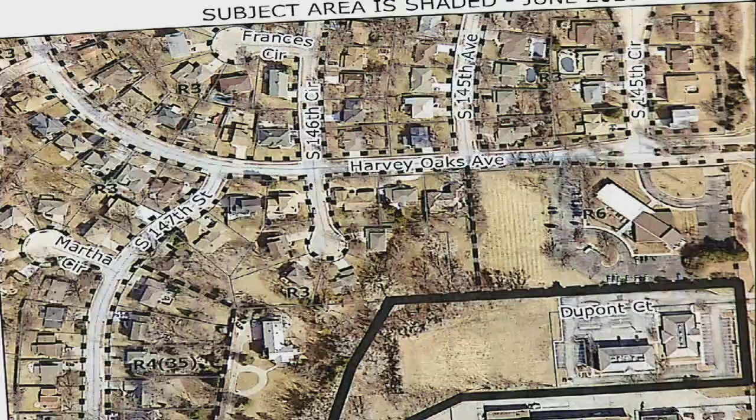So, starting out just kind of showing you the existing conditions and the surrounding zoning classifications. I know you're probably all relatively familiar with this location, but it's 144th and DuPont. It's outlined here in the black, 144th Street, West Center Road, running along the south side of the adjacent shopping center.

The adjacent zoning classifications to the north are R6, where the church is, and then R3. South of the proposed project is community commercial, east is also community commercial, and west is R3 and R4. The proposed site is a little over 5 acres in size.

It currently houses 2 office buildings shown here. The remainder of it is undeveloped and has been for quite some time. There's been a number of applications with respect to this property over the last probably 20 some years, so I think we finally have a project that will work here.

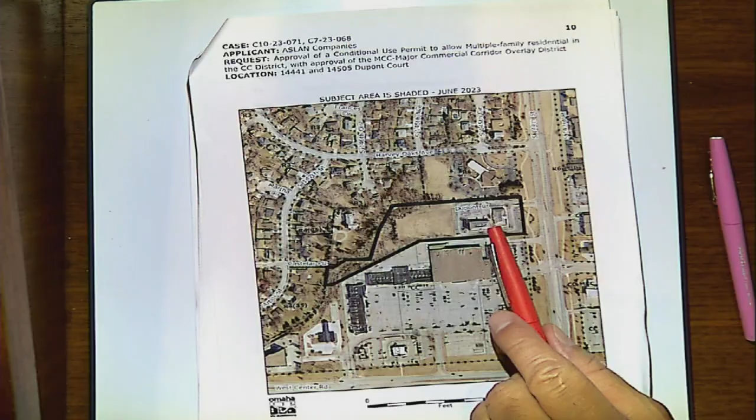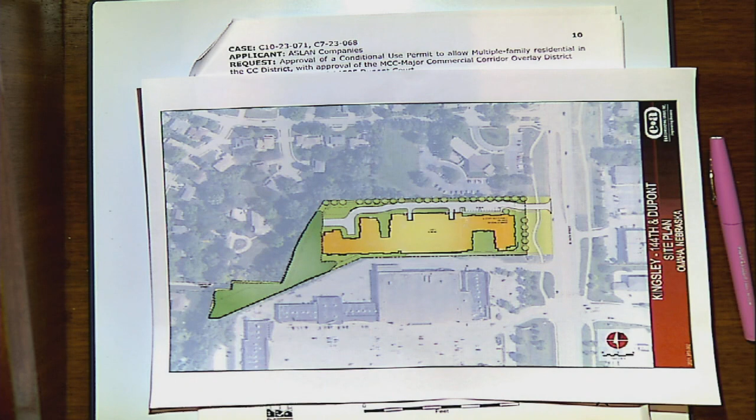The proposed project calls for the demolition of the 2 office buildings shown here and the construction of 1 building containing 199 multifamily units. This is the proposed site plan and the proposed outline of the building. So again, 1 building, 199 units.

It's a 5-story building, although in some locations it's only exposed 4 stories. As the property slopes down to the west, you can actually see 5 stories. Your elevations of the building are in the packet, and I do have some elevations I can show you as far as the general look and feel of the building from 144th Street.

So what we're seeking today is a conditional use permit to allow for this proposed project, and under the CC zoning classification, we can have multifamily with a conditional use permit that really allows you to go to the R7 base district zoning and site regulations.

There's also a recommendation of a major commercial corridor overlay district as well. Obviously that has to go on to City Council, but you're making a recommendation on that. So I just wanted to point out again, as you all know, that 144th and West Center Road is a...

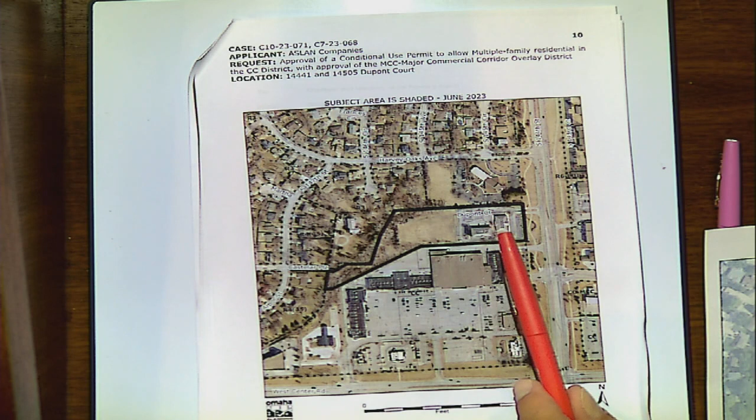165-acre mixed-use center. Also, West Center Road is a transit corridor that allows for unlimited multifamily units along the corridor. The master plan allows up to 500 units adjacent to the quarter-mile corridor, and also where you have a 165-acre mixed-use center. So again, 199 units is well under the 500 units permitted under the master plan.

As far as parking and all the other site regulations, we meet all of them, both with respect to the subdivision regulations and also the zoning code. The parking structure is contained inside of the building, and there are 345 parking spaces required. There are 355 parking spaces provided.

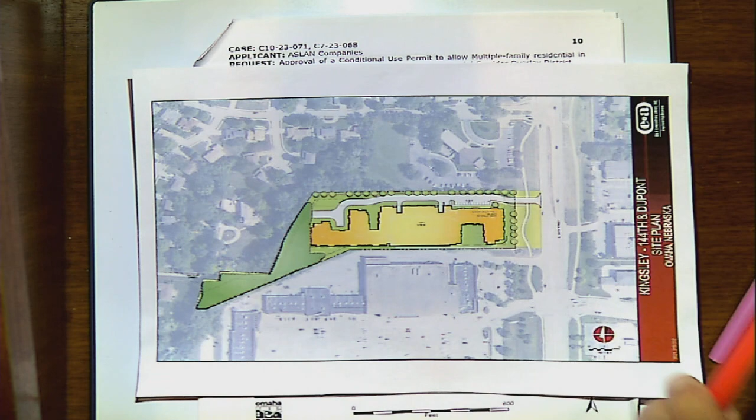There's also 12 surface parking stalls that serve the clubhouse on the north side of the building, shown here. So again, this meets all the site regulations for CC with a conditional use permit being R7.

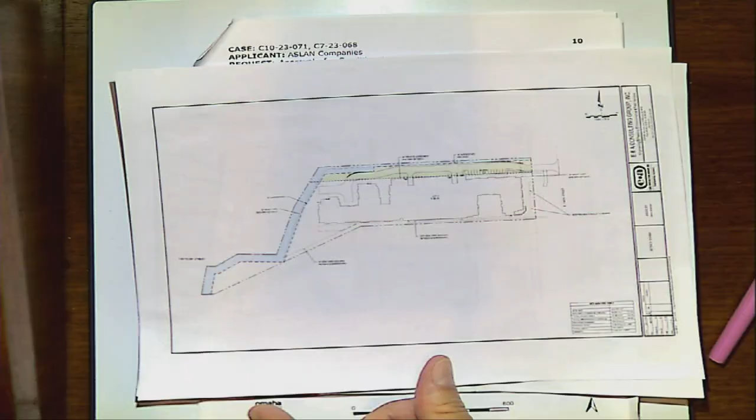There was some talk about a private covenant landscape buffer yard easement. We don't need to get into all the details of that, but all I can tell you is that it provided for a 60-foot buffer on the north side of the property, and I believe a 30-foot buffer on the west side of the property.

So what we did is we did an ALTA survey, and then we overlaid the site plan onto the ALTA survey, and we're outside of the 60-foot buffer on the north side of the property, and we're outside of the 30-foot buffer on the west side of the property. Other than that, we meet all of the other site regulations with respect to setbacks and buffer yards.

There was a zoning board of appeals case at one point in time, so we're completely in compliance with everything in that regard. We reviewed the recommendation report of the planning department, and we find the same acceptable.

There was a neighborhood meeting prior to the March planning board meeting that was laid over. I think the primary concerns were this private agreement, this landscape buffer agreement, which I think now with the ALTA survey and the site plan clearly shows that we're in compliance with from the private side.

I think the other concern was traffic on 144th Street. Obviously 144th Street is a major collector arterial, as well as West Center Road. I would just point out that this is already zoned community commercial, and the zoning uses could be much more intense under the current zoning than...

...they would be under the R7 in this particular multifamily project. So with that, we think this is really a downgrade with the conditional use permit from the existing zoning. And with that, I'm happy to answer any questions.

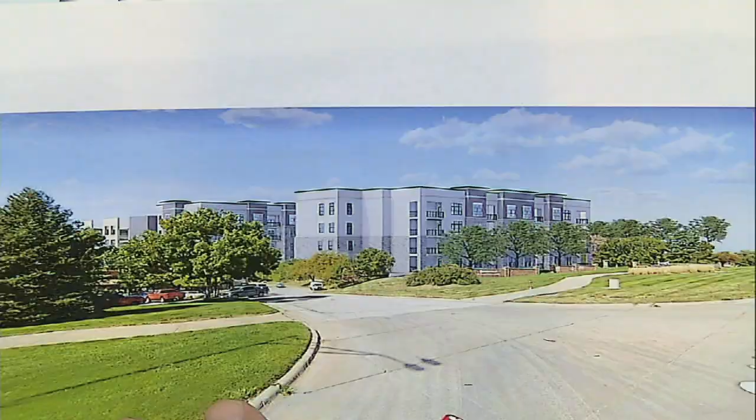This shows just another building elevation. This would be the shopping center to the south here, and this is the drive into the shopping center into the back. So this shows more of a looking northwest from 144th Street. Again, we think it's an attractive building, and I think it fits in nicely here.

There's still quite a bit of green space. All this back here is really undevelopable and is wetlands and drainage area and such. So I think this project is a nice project for this particular area and fits in well, both with respect to the shopping center to the south and to the single-family residential neighborhood to the north and west, and the church to the north as well.

So this was laid over in March, I believe. Right. And there was some opposition to the proposed plan then. Have you talked to, has there been any other meetings with the neighborhood since then? No, and the reason why we didn't think we necessarily needed to is because I think we addressed all their concerns.

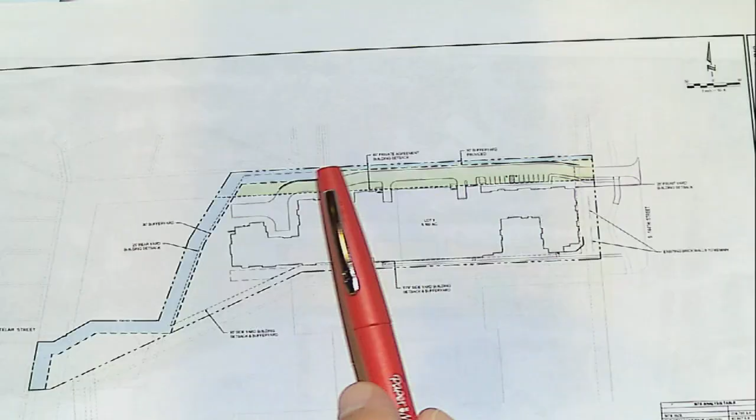The building that we had before came up into the buffer yard area and actually came into the 30-foot buffer yard on the R4 zoning here to the west. So the fact that we were able to push the building down and accommodate all the concerns, that was the main thing that we heard at the neighborhood meeting. There was probably 90 people there, and it seemed to me that the main focus was that you need to comply with this agreement. So we shifted the building down, and we were able to do that as shown by this particular exhibit.

Okay, good. Yeah, we got no public correspondence. I think most everyone's satisfied now. I think that was, like I said, the biggest concern. Good, good. Thank you. Thank you.

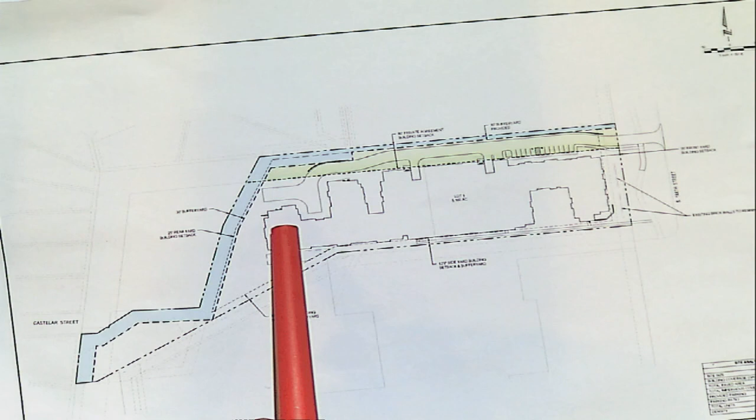As far as the 60-foot buffer in that private agreement, that's met all the way through on the north, and this is 30 feet here. You can see to the building, it's well beyond the 60 feet. So we think we're well in compliance with the private agreement that is in place, and we acknowledge that it's recorded. That's why we shifted the building south to stay out of that buffer yard.

We think we've addressed really all the concerns of the neighbors that we can address. The traffic is the traffic. We think this is a better use for this particular location. It's a down-zoning. There is no connection whatsoever between this particular project and the Harvey Oaks neighborhood or the church, so if people are making that kind of use of the church's parking lot, maybe that's an enforcement issue.

I don't know, but is there a plan to put a fence up along property lines or anything like that? I don't know the answer to that. I would say probably not, but there's no traffic connectivity whatsoever. Right, yeah, I get that.

Larry, do you know if pets will be allowed? Pets? Yeah, most likely, yes, pets will be. Will there be a designated area for the pets? Yeah, there's a designated dog park area somewhere on the site. I didn't see it designated on the site plan, but yes, that'll all be handled.

Larry, maybe you can't answer this question for your client, but I'm going to ask you anyway. Do you think this project would go through if that U-turn was eliminated? I don't know the answer to that. Let me just say, I'm not opposed to the plan at all. I am concerned about safety, truly. So it's not in opposition to the plan itself.

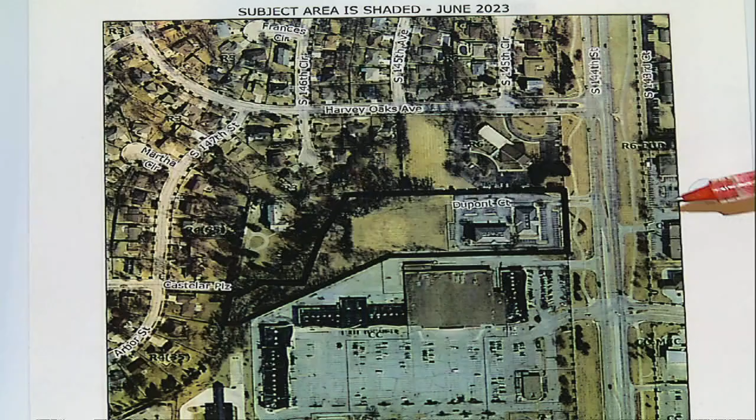Why is that U-turn there? It's only there for one—I can only see it there for this one piece of property—because there's a lighted intersection at the Harvey Oaks development where you can go any direction. There's another one on Harvey Oaks Avenue, so the only one really affected by that is the existing property. There's two accesses; the one in question is right here—I don't know how clearly this shows up on the aerial—and then there's a secondary access here on the backside at Harvey Oaks, the commercial part.

So to your point, yeah, there wouldn't necessarily need to be a U-turn movement there if those accesses didn't exist. But take a step back and look at the area as a whole and what we have in front of us today: the subject property is here, and they don't have frontage to any other right-of-way. Their only potential access is to 144th. Just to point out, this is kind of a relic of a previous regulatory framework where that was allowed to happen.

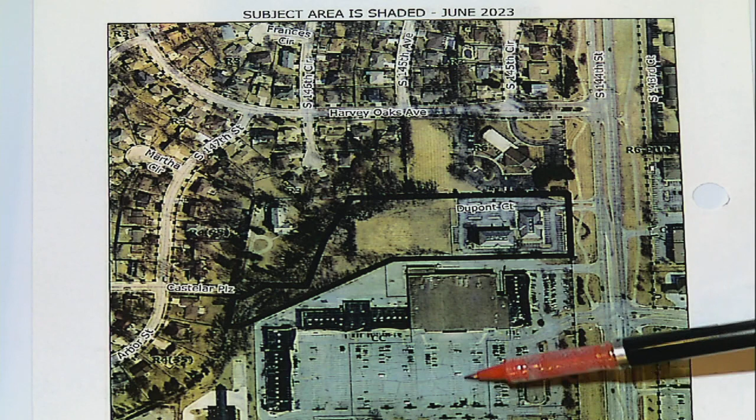We don't do that anymore. We understand these issues that arise, and over time we have changed the master plan and the city code so that the commercial area, the multifamily, the residential, and your civic uses would all be kind of integrated, with transition areas and things like that. But there'd be a network of public streets to handle all that circulation internally, and then there'd be one single access at a signal—there wouldn't be all these driveways and U-turns because we'd have that internal connectivity.

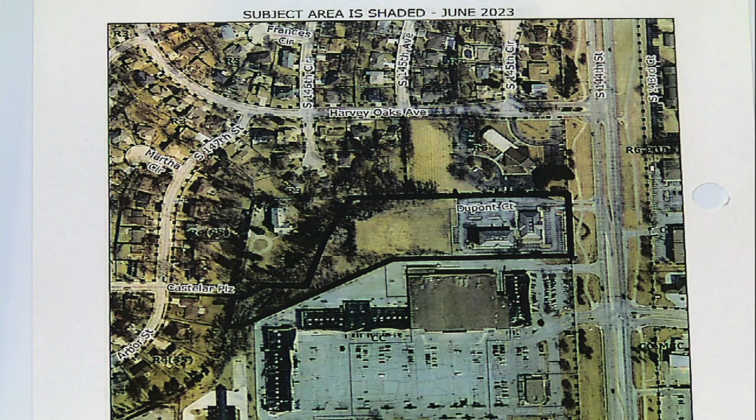So part of what we're dealing with is the fact that there's no driveway between the subject site and anywhere in the neighborhood. For better or worse, there's no way to undo or change that without a broad redevelopment, which obviously isn't in front of us today. So we're responding to the proposed plan to the best of our abilities based on what's out there today. Okay, thanks, Ryan.

Okay, any other comments or questions? Mike, were you going to say something? Okay, Eric?

Yeah, so I don't have too much to add. Obviously, the applicant has made several modifications since the original layover in March, both for some of the building design and the skin of the parking garage in the center portion of the building. So we appreciate working with them on that so that it is MCC compliant. There's modification to the access, narrowing it down from the current configuration, and clarification on the FAR to make sure that's compliant. So there's been a lot of work that's been done on the applicant team, and we appreciate it.

There are a few additional tree plantings that need to be added, but there's room for that both on the northwest corner as well as on the north portion of the site for the interior landscaping. So those are minor items. There will need to be some reporting due on the wetlands, which they'll continue to work with the U.S. Army Corps of Engineers and provide us information regarding that. So I don't have much to add. Obviously, we've discussed this a few times at pre-meeting, so I don't know if you have any additional questions.

This project is a two-phase, two-building project that's being proposed for the now vacant site. It includes the construction of a four-story mixed-use structure for one of the buildings, with about 16,000 square feet of main floor retail uses, perhaps about 7 bays, and about 81,000 square feet of office space on the upper 3 floors. The second building will be a 4-story apartment building with 99 units.

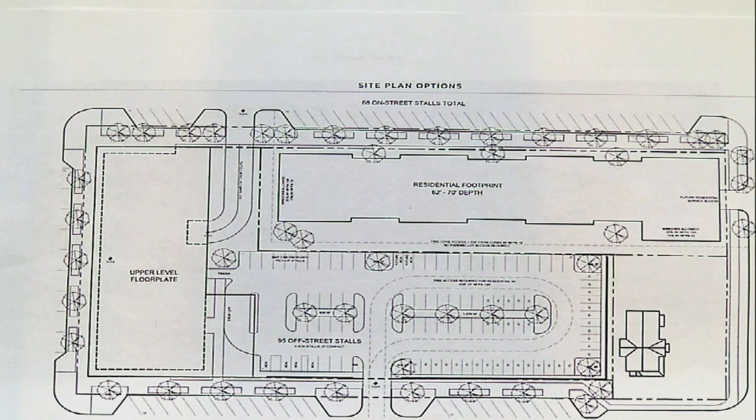This is one building, this is the other building. That building will include daycare facilities, a community room, and a fitness center. The developer is Forever North Real Estate, LLC, which is largely comprised of Carmen Tapio, Mike Peter, and Ashley Kuhn. Total project investment in North Omaha is about $72.5 million. The TIF support for the project is $9,463,221. Project meets the required criteria of our TIF program, has been reviewed and approved by the TIF committee.

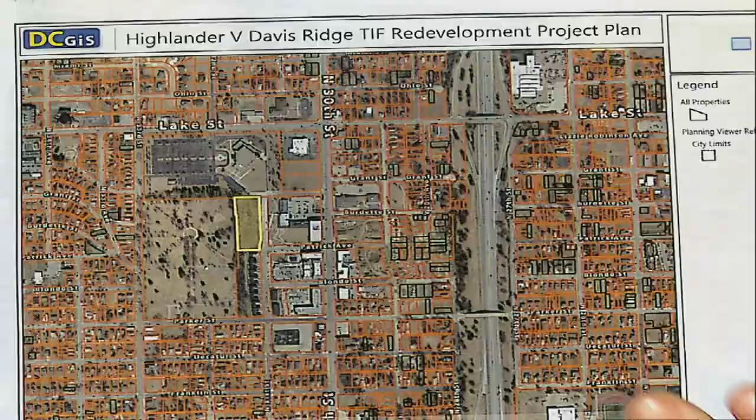Don Seaton, Omaha City Planning Department, will remain in North Omaha for the discussion of this project, located at northwest of 31st Street and Patrick Avenue. It's the parcel right next to the cemetery in red here. This is the 5th phase of the Highlander project that most people are pretty familiar with.

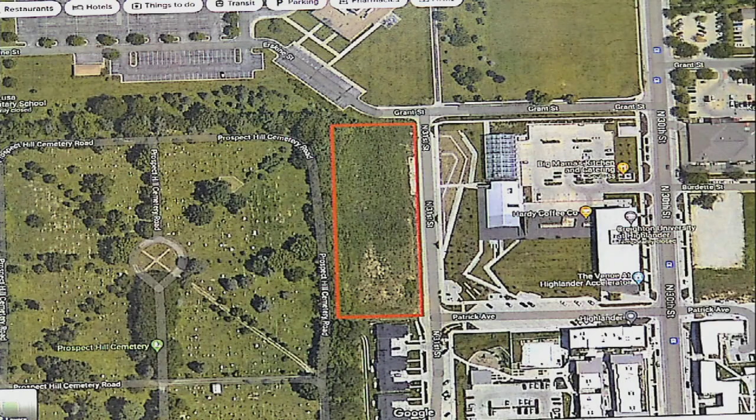It involves the construction of a new 41-unit mixed income residential development on the vacant lot. There will be 41 units arranged in 7 3-story walk-up residential buildings. This is the 5th phase of the project, and the developer is Brinshore Development, managed by Todd Lieberman. Total project investment in this project is $18 million.

The TIF support for the project is $501,775. This project has been reviewed and approved by the TIF committee. It is an appropriate land use for the area, complies with the goals of the city's master plan. Really, it's just an expansion of what we've seen at Highlander so far. Very good developments, positive developments for North Omaha. We ask for your approval.

Thank you, Don. Any other proponents wishing to speak? Hi, Bill Lukash, Brinshore Development, 903 South 184th Avenue Circle. Here to answer any questions you might have about the project.

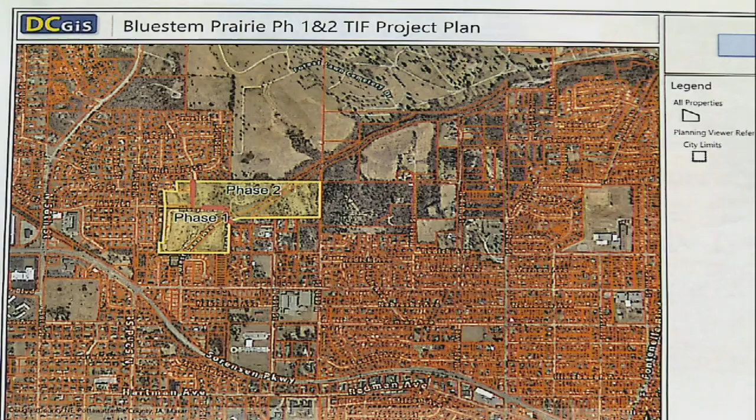It's adjacent to Habitat for Humanity's Bluestem 1 TIF project, where presently 85 homes are being developed. The two phases of this project involve 112 additional new single-family homes that will be built in two phases. The project site is within an extremely blighted area. It qualifies for a 20-year TIF term.

The developer is HFHO Real Estate Holdings, which is basically a subsidiary of Habitat for Humanity. Amanda Brewer, CEO. Total project investment for both phases is approximately $49.3 million. The TIF support for the project in phase 1 is $3,971,458, and for phase 2, an additional $3,036,997.

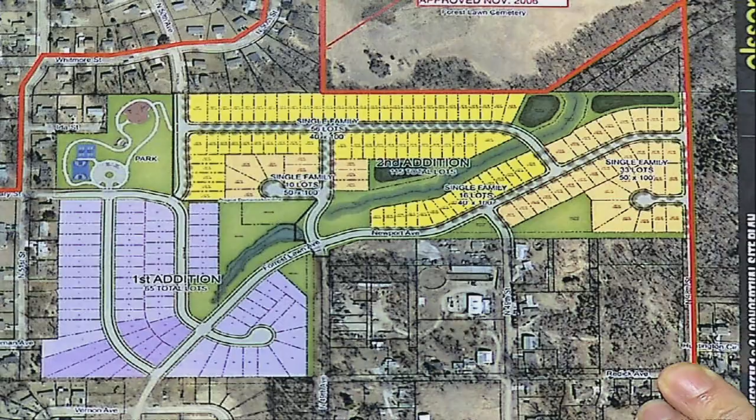Again, this project meets the criteria of the city's TIF program. It's been approved by the city TIF committee. It's an appropriate land use for the area, complies with our city master plan, and again we ask for your approval. A couple more exhibits showing the two phases and the lot layout, and then some example building elevations.

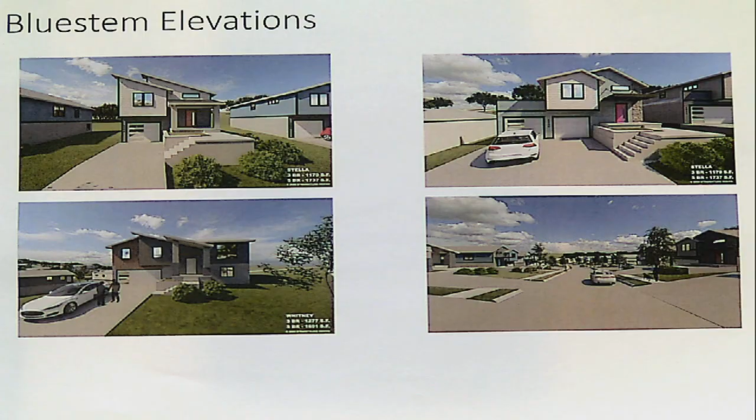Good afternoon. I'm Al Shimmick, 5006 North 192nd Avenue in Elkhorn. I'm Finance Director for Habitat for Humanity and would be available for any questions. Okay, thank you, Al. Any other proponents?

I'm Steve Brunken, the Executive Director and General Manager of Forest Lawn Cemetery. I'm not here for or against, but I have some concerns that should be addressed. The area immediately adjacent to our undeveloped land has been known to become a playfield or playground for ATVs and motorcycles. There's been hunting in there; we have evidence of that. The land is not safe for ATVs or cycles. There are ravines in there, and we have concerns about liability if kids would get back in there and do things that kids do. As far as the project, I'm neither here nor against, but we're just concerned about safety for the residents that will be moving into the area. Thank you. Any other proponents?

Seeing none, are there any opponents? Seeing none, close public hearing.

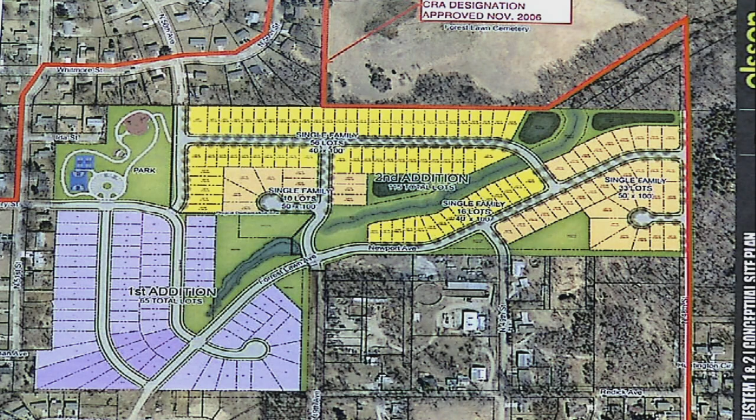Eric, did you want to address Steve's concerns? Well, I don't know where the ATV activity is taking place. Obviously, if they're trespassing or causing problems, we'd encourage reaching out to the authorities. What Habitat is doing in this area is great, both in the southwestern portion, shown in purple, which has already been platted and gone through the entitlement process, as well as this second phase. That plat was just laid over on the consent agenda for a few items that'll get worked out, and that'll be before us soon. This is a very challenging area given the history of the site and the difficult terrain, with a lot of unimproved streets. So I think developing this area for housing, which includes a component of affordable housing, is a great benefit by and large.

I did want to make the comment that you had three TIF cases here today, and sometimes TIF gets a bad rap, but every single one of those cases had a component of affordable housing in it. You don't always see that with all the TIF cases, but I think it's great and wanted to point that out. So staff recommends approval.

Any additional comments or questions? Do we have a motion? We have a motion and a second. Please record the vote, Kathy. Rosacker? Yes. Franklin? Yes. Morris? Yes. Pate? Yes. Sotolongo? Yes. Mr. Chair? Yes. Approved 6-0.

Agenda item number 16, case C10-23-133, C12-23-134, applicant Drew Lyer. What?

Sorry, go ahead. No, keep going. Okay, I said it was laid over. It's on the next case. Which case are you talking about? We're on reading, case 16.

Yes, okay. Request preliminary plat approval of Bluestem Prairie Second Addition, a subdivision inside city limits, along with approval of a rezoning from DR to DR and R5. Location: 4966 Newport Ave.

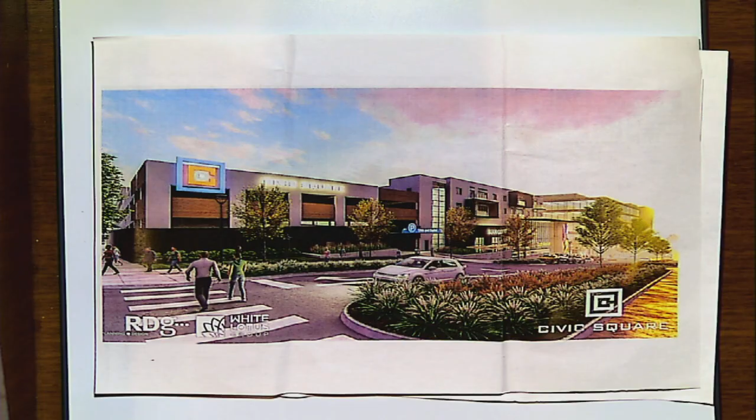The idea is they're looking hard at creating the intersection as a venue of opportunity for art fairs or Friday night concerts, that type of thing. So multi-use, they're working very hard. They've engaged a couple architects already for diversity in the architecture. Some samples you saw in the previous submittal — these are just images, concepts right now, but just to give you an idea of the flavor and tone of what they're trying to do and working forward to it.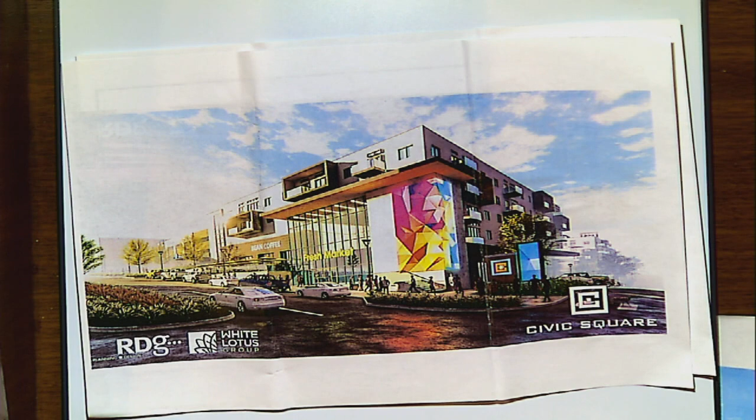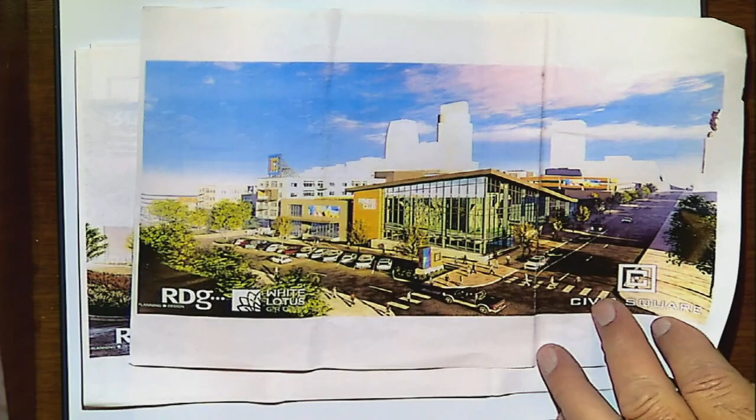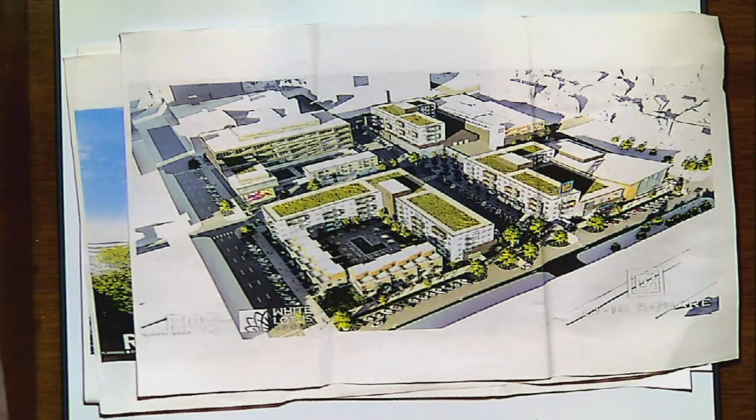So you would think a clear site has no obstacles, but this does. There's a significant grade change from north to south and east to west. Everything drains to the southeast, and we're working through those grade issues as we go through the architecture, trying to conceptualize what works cohesively using the different elements we're talking about. This is kind of an aerial view, giving you the bird's eye view of what they're thinking right now. So I'm here for questions.

We've talked to the staff — Dave, I appreciate the planning department again, they're always so great to work with. We worked with planning and public works on this to reach this point. There are a couple new requirements now with the recent passage of NDOT on the 5-foot back-of-curb clear space they're requiring now, so there's a little bit of plan change, nothing major — more right-of-way, a couple feet on each side to create the tree wells we need. We talked to Jed extensively about the urban design issues and recommendations we saw; we weren't alarmed by any of them, and we were aware those comments were coming.

It's a concept, I won't commit to that, but they'd certainly like to do something. Given the location off the interstate like this, the access to this site is incredible as far as driving by and seeing it or getting to and from it. So those are all opportunities they're exploring very hard. It's exciting to see some progress on that because it's such an eyesore right now. And I really like the concepts — if it comes anywhere close to that, that'll be a home run. Thank you.

Okay, any additional questions? Thank you, Dan. You're welcome. Any other proponents?

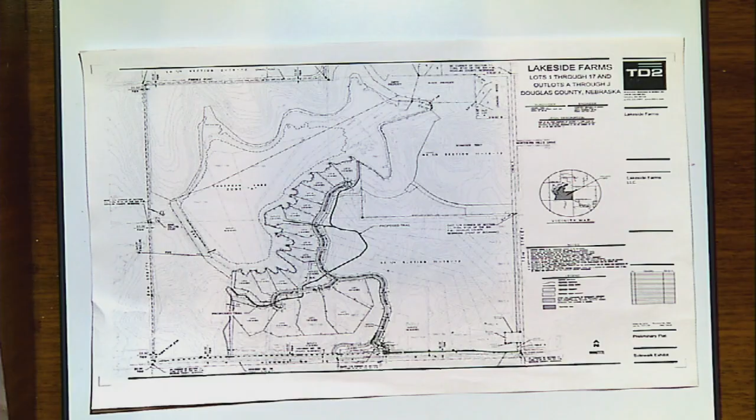We've been working with various representatives of the city, the planning department, Public Works, and others to come to an agreement on how best to proceed with the developer's vision for this project. It's taken a lot of time to get here, and we've worked through a lot of issues. We appreciate the city's help, assistance, and input in getting us here today. I think we've reached a point where everybody is okay to move forward, and we're looking forward to it. It's a legacy project for the Hofer family, and they're looking forward to advancing this and getting homeowners out there who can really enjoy the area. It's a beautiful area, beautiful lake, beautiful piece of property, great topography. We're here to answer any questions you might have.

Thank you, Jim. Just curious, is the lake only accessible to the lots and homes that front the lake? Yes, it's a private lake, constructed privately, and it's a privately owned dam and project.

Any other proponents? Seeing none, any opponents who wish to speak? Go on down, give your name and address.

Good afternoon, Pat Ackerman, owner of the North Omaha Airport, 11901 North 72nd Street. A couple things I wanted to add. I'm not necessarily against the project, I just wanted to highlight a couple things about this piece of property. Let me pull this up.

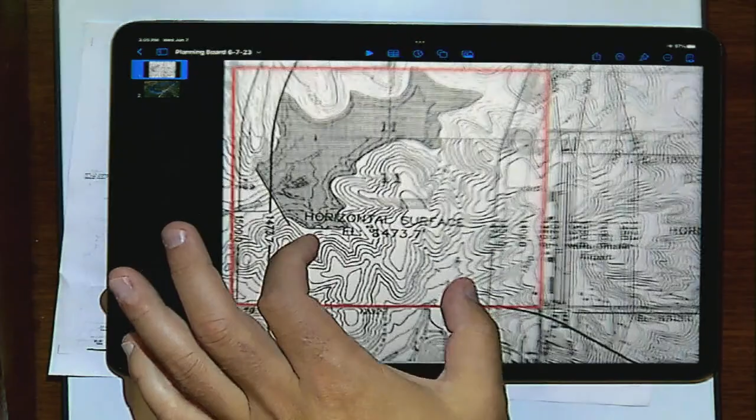In the analysis of the report, there was no mention of AV zoning for this property. This property, per the AV zoning, falls in some areas within the transitional zones. You'll see I've highlighted that here — in the red section is the property, the airport is just to the east, and those lines are the transitional zones. Actually, the entire airspace does cover the lake, so I wanted to make sure that was mentioned as part of this development, and that the city reviewed it to make sure it's in compliance with AV zoning as part of the approval recommendation.

Secondly, I wanted to make sure we're also aware that the traffic pattern for the airport is over top of these lots. As an airplane takes off to the north, comes around, and lands to the north, the traffic pattern of the airport will fly over these homes and lots. I want to make sure that's part of the record — the airplanes will be flying over these homes as part of the standard traffic pattern.

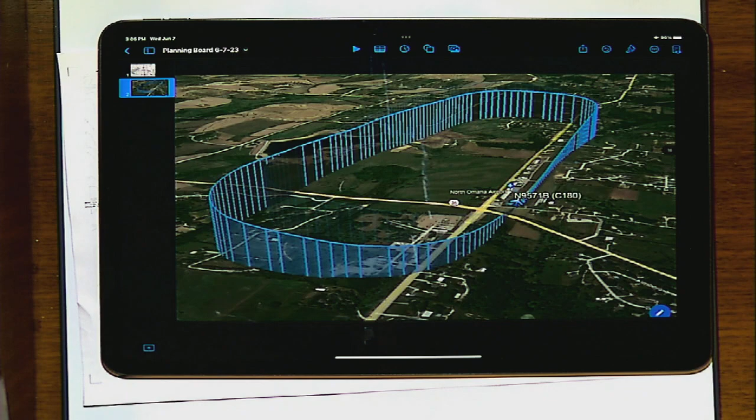Pat, can you keep that up? Yep, sorry, that was loud. Can you keep that up? There's a lot going on here, what are we looking at? What is this visually representing? So the airport here... okay, yep.

There's the airport, and the standard pattern for an aircraft is a left crosswind to a downwind, which will go over top of the lakes right there, and the actual lots are right there, and it comes back in on a base and final to land at the airport.

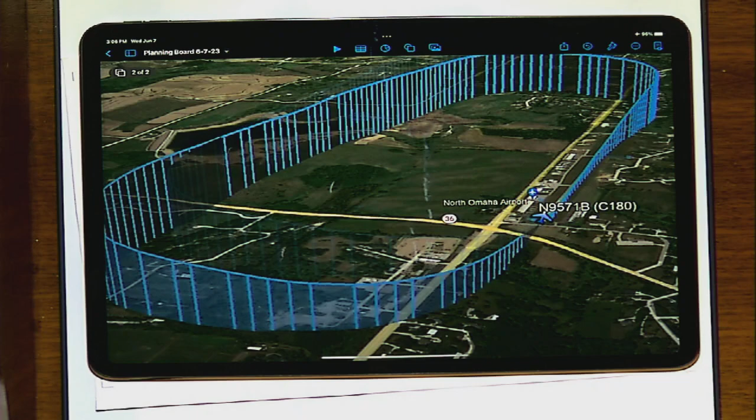Is this the elevation you're showing generally in the vicinity of the subject site? Sure, kind of on the left part of the screen there. So over this property, the normal traffic pattern is 1,000 feet above the elevation of the airport. Lonigan Lake is lower than the airport, so you're probably looking at 1,200 to 1,500 feet above the houses. Again, not a concern of mine, it's just that I want to make sure people are aware that airplanes will be flying over these homes.

How many flights per day do you have currently? Right now we're at 4 to 5. Though, as many of you are aware, we are working on projects around there to increase traffic into that site, so there will potentially be a lot more in the future.

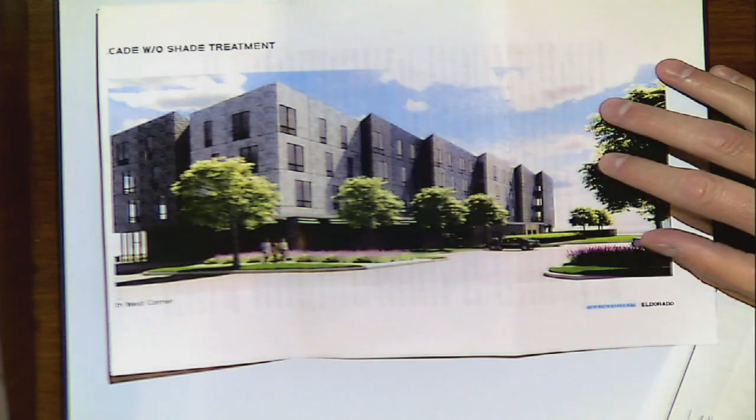Not the best quality, but Kennedy Square West is a 39-unit mixed income multifamily building. It is the last phase to use choice neighborhood funds from the city and OHA's 2019 Choice Neighborhood Implementation Grant, the last phase of the North 30th Street Transformation Plan to use those funds. With those funds, roughly a third of the units will be reserved for former residents of Spencer Homes. A third will be affordable housing units, or made available to be affordable level, I should say. And then roughly a third will be unrestricted or market rate units.

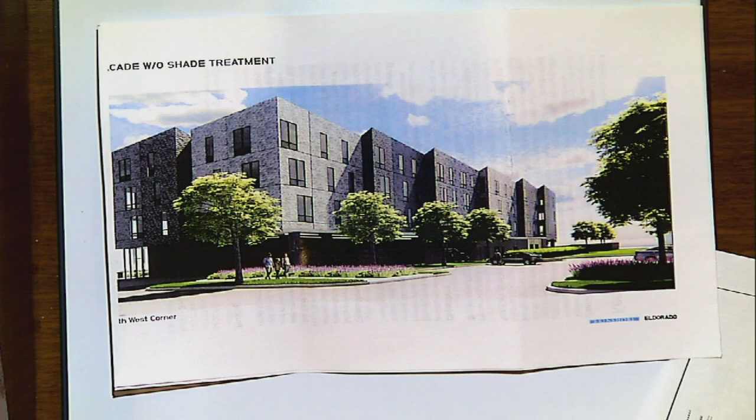The parking lot across the street to the north will be resurfaced. Landscaping will be included to make it more attractive, but it will remain a parking lot. The property will be owned by a partnership of the Omaha Housing Authority, Brinshore Development, and 75 North. It will be managed by the Seldin Company, very similar to the other projects at the Highlander development. I'm here to answer any questions, and I'll turn it over to Terry now.

My name is Terry Morrison with Earhart Griffin & Associates, 3552 Farnam Street. I'm the civil engineer on the project and provided the application for the rezoning. I can answer any questions you may have. Thank you, Terry.

Good afternoon, Joni Poor, Omaha Housing Authority, 1823 Harney Street. Just here to answer any questions. Okay, thank you, Joni. Any other proponents? Seeing none, are there any opponents?

My name is Jeremiah Saffold, address 3035 Emmet Street. I have some concerns about a 39-unit dwelling going there along 30th Street, between Emmet and Bedford.

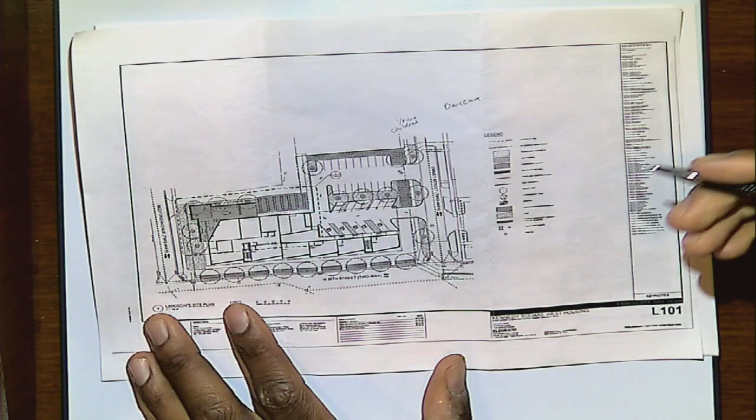First off, the street congestion. So currently, I looked at the plans. I don't know if the picture's up there or not, but looking at the plans here, this is Emmet Street along here. This currently is a residential street. We live, there's residence houses along there. We live up there.

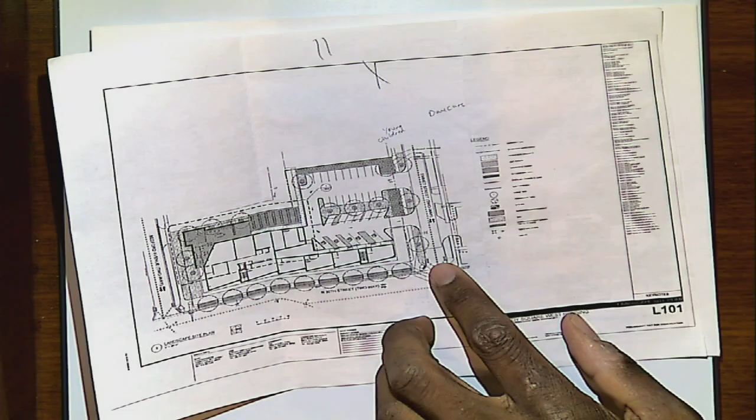So along 30th Street right now, it got a redevelopment a while ago down to 3 lanes, where you have the left, north and south traffic, and then the middle lane for turn traffic. Turning out onto this, it's quite busy right now with the traffic along 30th Street. A left turn from Emmet Street onto 30th Street is quite difficult, and adding 39 more units with the proposed 76 parking spaces, down to I believe 63 with the bus stop and other things, is going to add quite a bit of traffic there, which is really going to force people to turn west on Emmet Street, where we have young children and a daycare at the end of the street as well. So it's providing a safety concern for us as residents of the neighborhood.

And then also increase in foot traffic. There's going to be an increase in foot traffic if we're adding 39 units. I've seen that there's going to be a bunch of 1-bedrooms and 2-bedrooms, and a few 3-bedrooms. So you're looking at probably at least 80 new residents on the street, give or take a few. Also, right now it's a thin street, but also for the parking spaces, they also talked about parking along the street as well, which is going to congest the street even further.

I guess I had some questions for even the developers, but I suppose I can speak to them since they're in the room. I'll read something here I got from the Omaha Master Plan, the housing element, in a part that says creation and preservation of healthy neighborhoods, owner-occupied housing. It says homeowners are more strongly anchored to a neighborhood through ownership. And another quote from that same segment says, once a single-family dwelling is lost to the investment housing market, it is unlikely to become an owner-occupied dwelling again. I think what this is saying in the Omaha Master Plan is that they want to increase and advocate for home ownership.

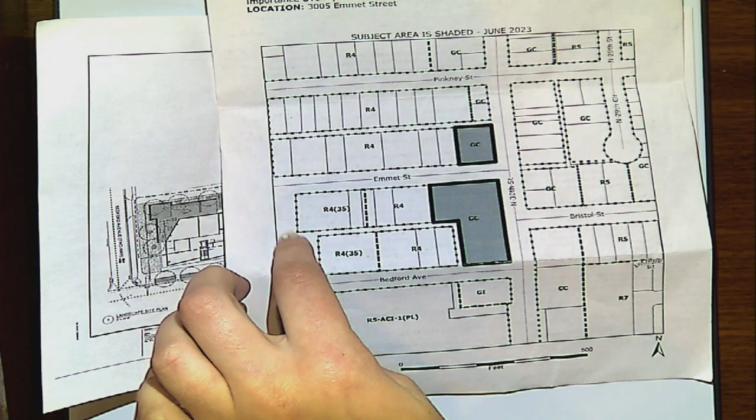Okay, so I just want to give a visual of what he said. If you look here, these are the units, this is our home, this is a church, and this is an alleyway that's not used - it's overgrown and doesn't go all the way through to the street. This is a place of worship, and our actual driveway to our home is in this alleyway. So when it comes to parking, none of these homes have driveways.

So all of these homes already do street parking. So if we're saying maybe adding to that. Secondly, when it comes to safety, again, this is a daycare right here, so then since they can't take a left very easily coming around.

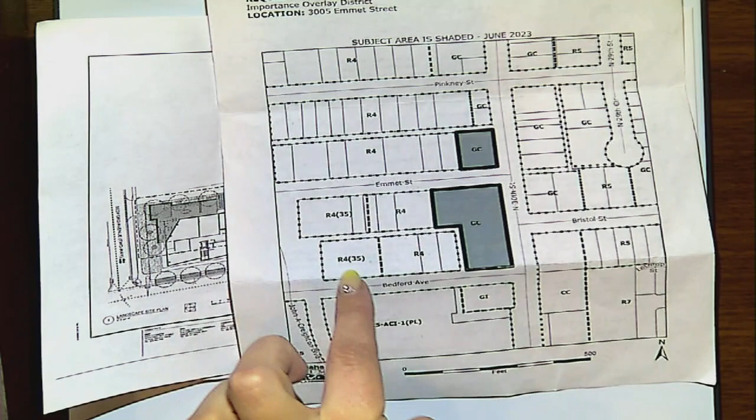Also when there is traffic here at J.A. Creighton and Bedford, we commonly see people go through the church parking lot to go through this way, or to go from J.A. Creighton to Bedford. This is our driveway, our backyard, already where children play and where there's a place of worship. So increasing traffic is a very likely possibility if this is just a four-way stop. If there's a few cars backed up, people easily just go through the parking lot to try to be easy, and that would increase that even more.

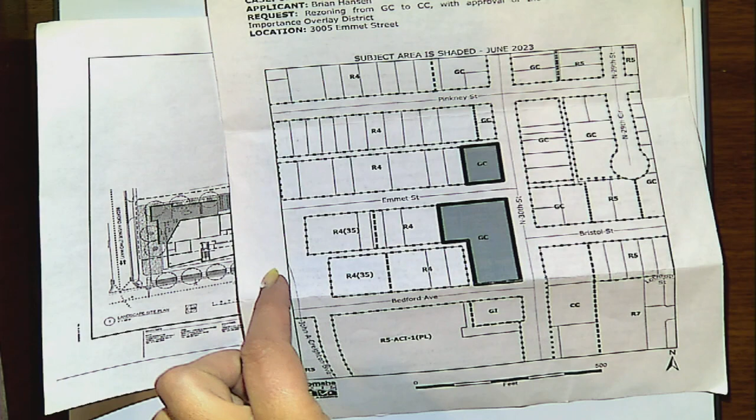Also foot traffic concern - it's an easy walk back here through the parking lot, and through this alleyway. Like I said, it's an overgrown alleyway, not actually used because the current community center that is there blocks it off for vehicles.

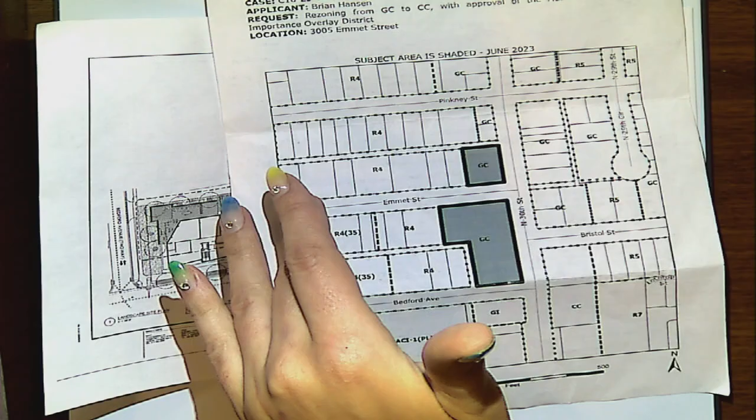The biggest thing for me isn't this changing - this is a community center that hasn't been used the entire time we've lived here. You can walk by, there's mold, all that. The biggest thing is that it's 39 units of rented houses. We would love to see townhomes that people can purchase and have ownership on our street. It would change it from maybe 10 residents to obviously at least 39 plus, because we know most of these won't just be a single person living there.

So it would just be really changing the entire feel of one of the nice quiet streets in North Omaha. It would completely change that.

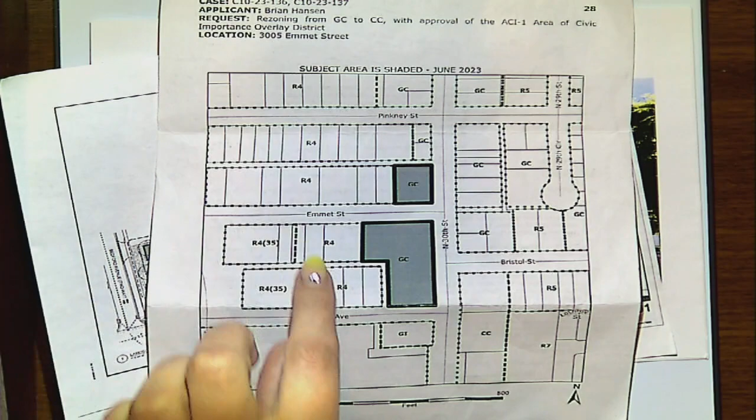That's all I have. Courtney, could you put that back up again real quick? I was writing - where was the preschool at? There's a preschool right here, but I was talking about an in-home daycare right here. And they have kids and all that right there.

And then there's kids on our street. Like I said, it's a family street, just houses. I think the in-home daycare might be someone who rents it, but other than that, everyone on our street is homeowners. We plan on staying there, and we've been there five years - we're the newest people there. It's just not a street that we want 39 units on. I mean, I'm thinking maybe 100 plus people. It's a very quiet street right now, and we'd like to keep it that way.

Okay, thank you, Courtney. Any other opponents?

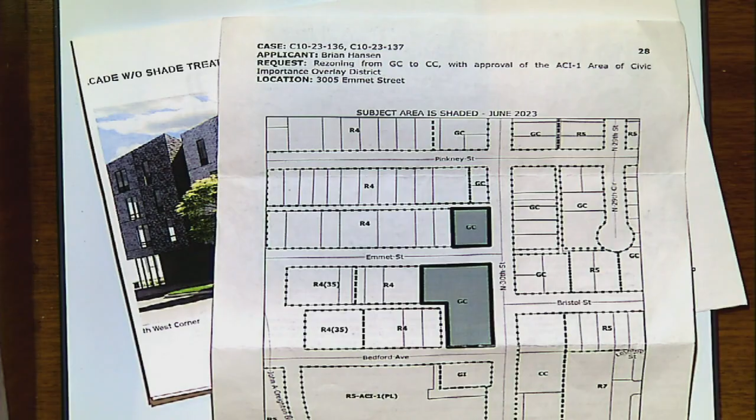Hello, I'm Clark Williams, representing the family at 3031 Emmet. For one, I did grow up there - there's a lot of tradition there. One of my biggest concerns about this situation is, of course, safety and housing development that doesn't represent what the master plan is saying as far as building up the community and home ownership.

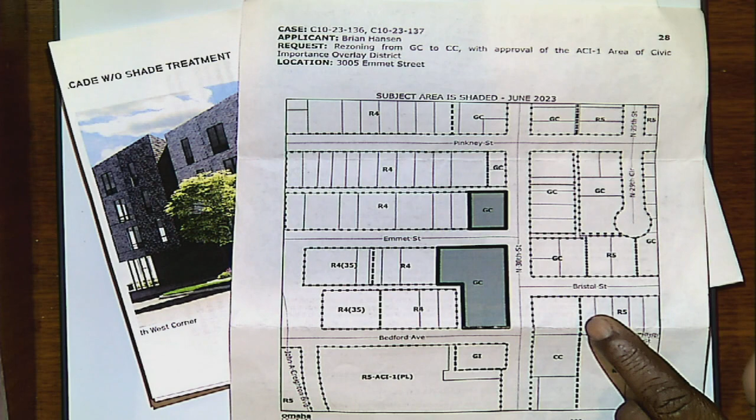One of my biggest safety issues is the fact that if we put 39 units right here on Emmet Street - I don't know if anybody did a traffic study, but Bristol Street and Bedford Street are very close corners right there. If they build 39 units right there, the traffic congestion would get a lot worse. If we do a study on how many car accidents happen right here at these lights, we see car accidents there all the time. And to add almost 80 people or however many people you'd add with 39 units, it would make Bristol Street and Bedford Street so much more dangerous.

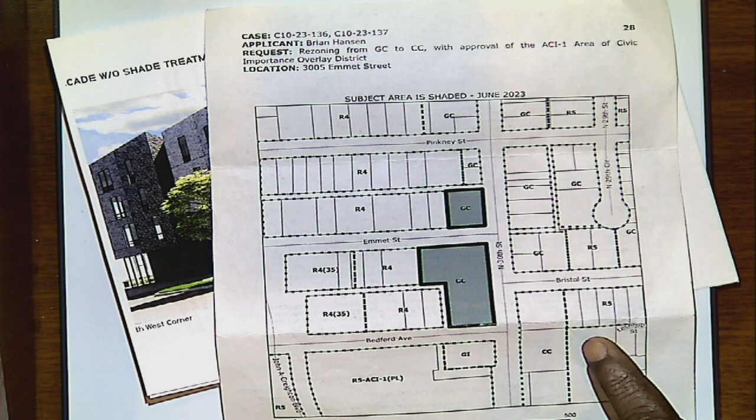And then right to Emmet Street right here, it just makes that little corner - three corners - very dangerous for the families and for the people that are building there.

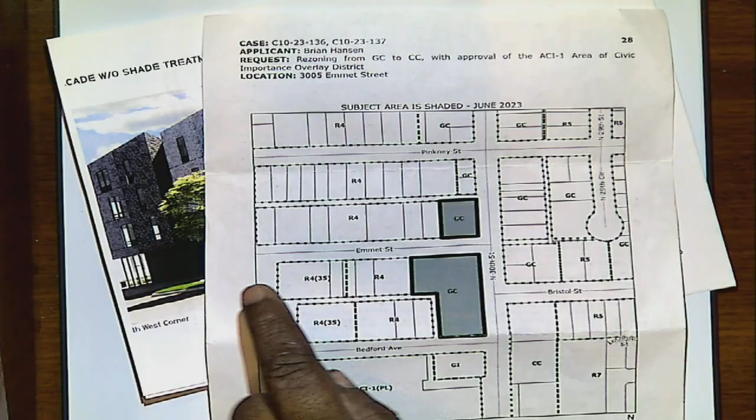And not only that, it just doesn't represent home ownership for the people in the community, because the housing authority and the land developers are the only ones who would really benefit from this being there. The community - habitat, they did build a lot of houses up on maybe 32nd and Emmet, further up between 32nd, 33rd, from the Malcolm X Center on down. They built a lot of housing developments there and quite a few blocks on the other side.

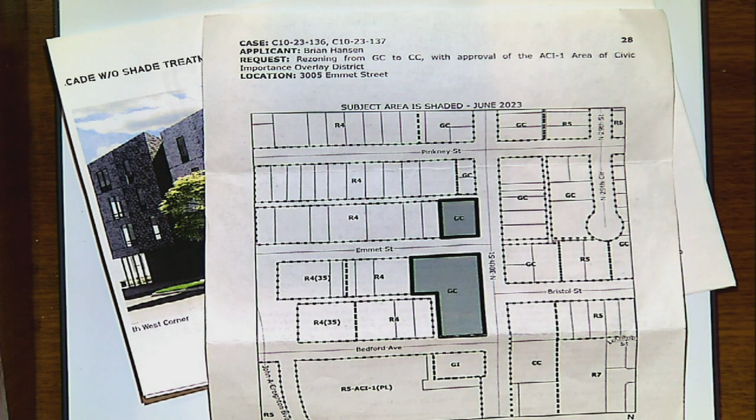I think it goes back as far as to Pinkney and Pratt. When they were building that, everybody in the community was looking forward to it being more houses and more things that would benefit the community. With 39 units there, it wouldn't benefit anybody in that community. Not only would it be taking my family away from a place we've been for over 50 years, with so much tradition there, it wouldn't bring any value besides to the housing authority and the land developers.

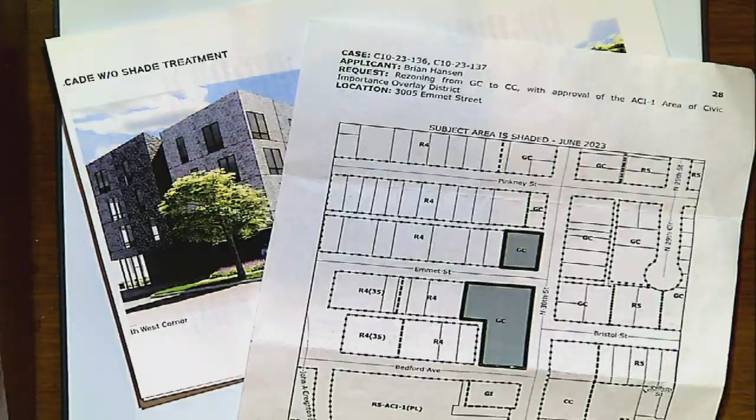There's also a safety concern on those 3 corners right there. I don't know if anybody did a traffic study, but it's already a very dangerous corner. You might want to do a traffic study to find out how many accidents happen among those 3 streets. If 39 units are put there, it'll make it that much more dangerous. That's about it, thank you.

Thank you. Any questions? Nope. Any other opponents?

Cheryl Weston, 1299 Farnam Street, Omaha, Nebraska, 68102.

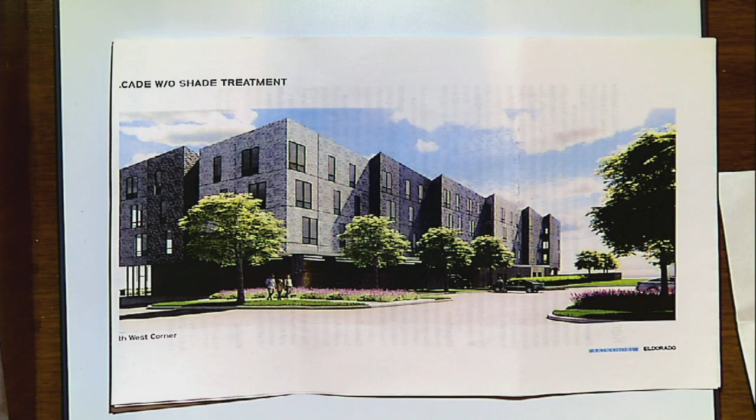I'm definitely a proponent against this for several of the reasons people have already stated. Look at that—would you want this in your neighborhood? No, you wouldn't. Not one of you up there would. You keep telling North Omaha about home ownership and all the good things coming to North Omaha. Is this more good things coming to North Omaha? You promote it, just as the young man said, in the master plan.

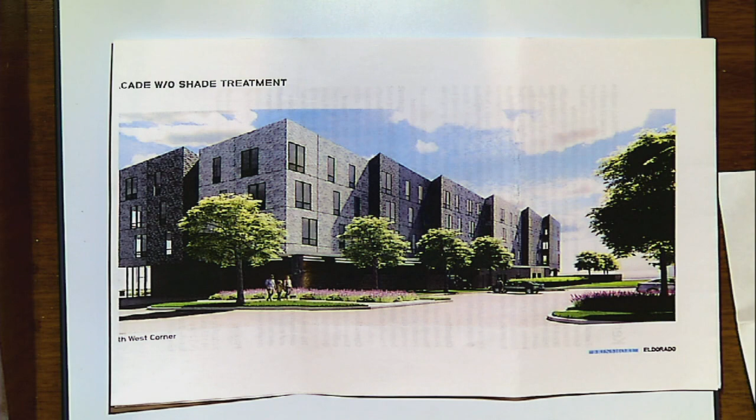We have the city planning director right up there. The master plan says home ownership, particularly for North Omaha. This is not giving home ownership to North Omaha. All this is doing is redefining the projects. You had those on North 30th. You have new ones going south of this area. And now you want to put 39 units in a 4-story building? That is wrong. What are you doing to continue to keep North Omaha down and be nothing but rental property for real estate developers, which some of you probably have contact with?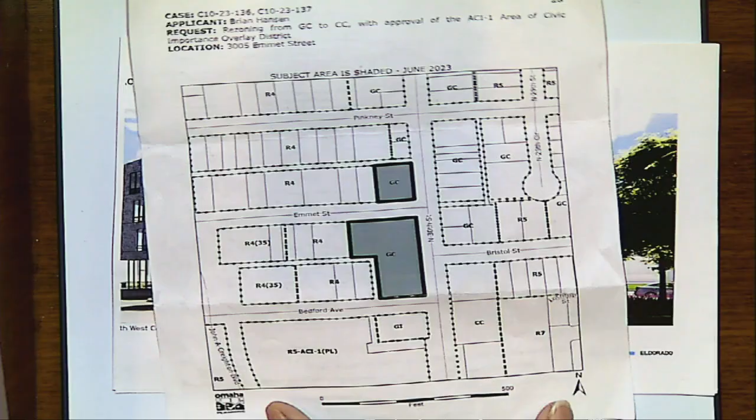The traffic, as he spoke before, is terrible on that corner. There are accidents all the time. People run the lights all the time. You're going to have 39 units, and you know there's going to be children, and you're putting them on a busy street. It's already cut down to one lane going in each direction with a center lane, and people miss it all the time, or try to go through it very quickly.

It also says here in the plan that it's going to be developed to market rate standards with a unique contemporary look. We all know that's not going to happen here in North Omaha. We know that because we live there. I've lived there almost all my life, and I intend to stay there.

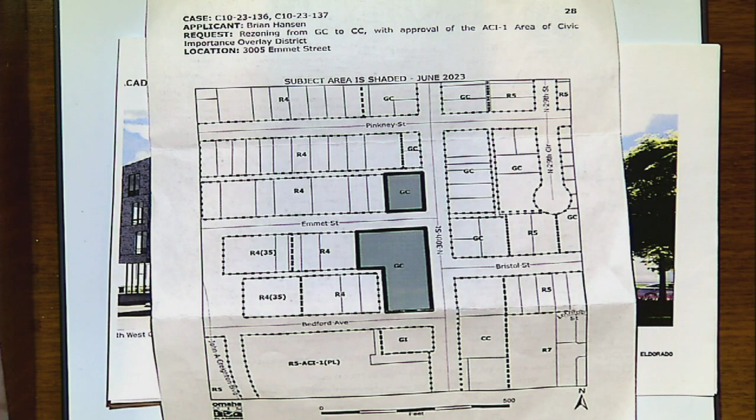We're asking you—we're coming forward. You keep wanting to say and encourage home ownership, the American dream, in every other area. Then why don't they put some townhomes or single family units here instead, where people can move in, rent for approximately 3 to 5 years, and have an escrow account to purchase those homes. When you have home ownership, the neighborhood becomes a neighborhood.

It's not a hood. There are some of us in North Omaha who live in a neighborhood, just like you do. I bet not one of you go out and talk about your 'hood' here. That's what we're trying to change, to make this a neighborhood. We're trying to get young couples like this to continue to purchase homes in that area.

Instead, you want to approve this, and you will today. We've come here, we've shown that we care. Many more wanted to, but because of the timing they couldn't come down—they have to work because they're trying to hold on.

Sir, could you at least give me a few of your attention? Excuse me, I'm taking notes, please. Didn't appear to be. That's what—like I said, I know this is futile, but we still had to try. Cheryl, I'll vouch that he's been taking notes the whole time you and everybody else has been talking. It didn't appear that way to the person standing up here. Okay, if you say so, then we'll have to take that.

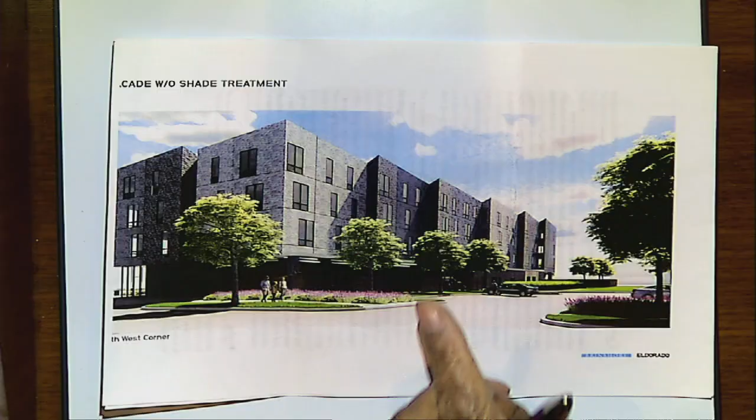But we just wanted to come down here and try to say, don't do this. There's enough of these properties that look like this already. Put some homes in there. You know why? We don't even have a grocery store in our area. They're planning on building one, but that's down on North 16th, near downtown. And they keep telling us, you don't have the rooftops.

We would have rooftops because if we had people who wanted to move into our area. I don't want to belabor the situation so you can get to the vote, but think about it. Sometimes it just takes one to stand up. This is not the project for there. Thank you.

Any other opponents?

Hello, my name is Gwen Easter. I'm with the Commission on African American Affairs. I'm a commissioner. Yes, and I also live at 2895 Pinkney Street, just a couple blocks down from them. And I'm here to be in agreement with them.

Families should not be asked to move out, lose their properties so these developments can come into our community. And as they did already touch on safety, it's a huge problem. 30th Street, they got the bike lanes that should have never been there in the first place, barely used. There are families who have lost their homes already being pushed out of North Omaha.